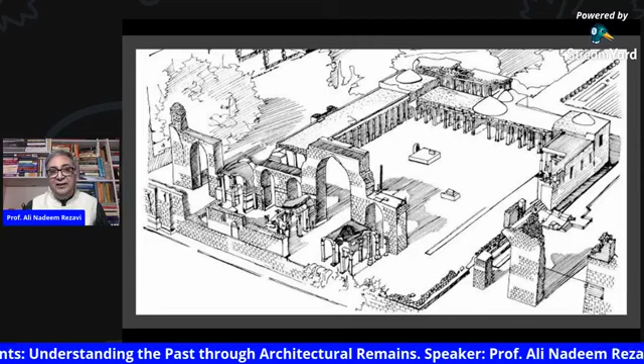For example, here we come to one of the first monuments which was constructed after the establishment of the Delhi Sultanate in India. Now, with the establishment of the Delhi Sultanate, a new type of culture was introduced into the Indian subcontinent. I don't know whether you have read the introduction to volume 2 of Elliot and Dowson by Professor Muhammad Habib. That has also been published independently now by the Center for Advanced Study. It is also part of the Elliot and Dowson volume 2. Muhammad Habib's, and you will find it on the internet as well. Go through it.

Muhammad Habib talks about the fact that after the coming of Islam in India, after the establishment of the Turkish Sultanate in India, two types of revolutions occurred. The first, the urban revolution, and then with the Khaljis, the rural revolution.

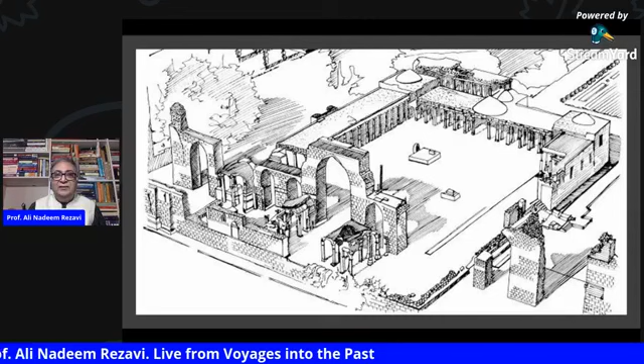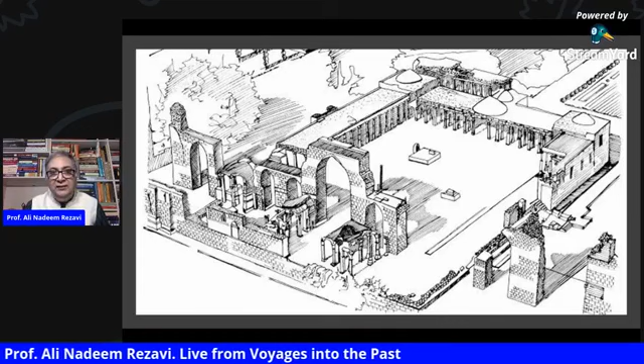What he's talking about is the fact that when these Turkish sultans came and established their sultanates, the artisanal classes, the people who till yet had been living in the villages, to cater to the needs of these new sultans, the new ruling elite, the nobility, started migrating towards these urban centers. Slowly and gradually, not only did the size of these urban centers start growing, but when they started living along with the new masters, they started imbibing the new culture and habits.

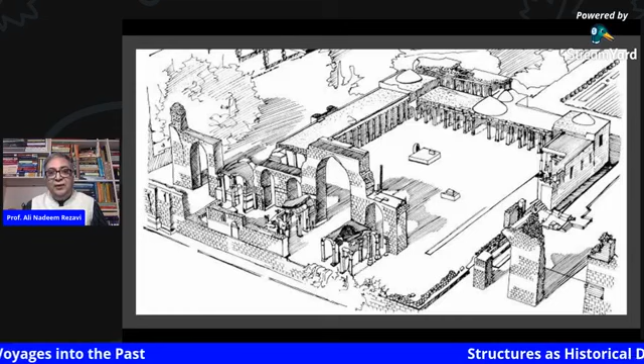And one of the results of the interaction between the local indigenous cultures and the one which had been brought into India by these conquests was that a new type of architecture, new types of buildings, everything started growing. And one of the finest examples of how there was intermingling of both the cultures soon after the establishment of the Delhi Sultanate can be reflected through this monument before you.

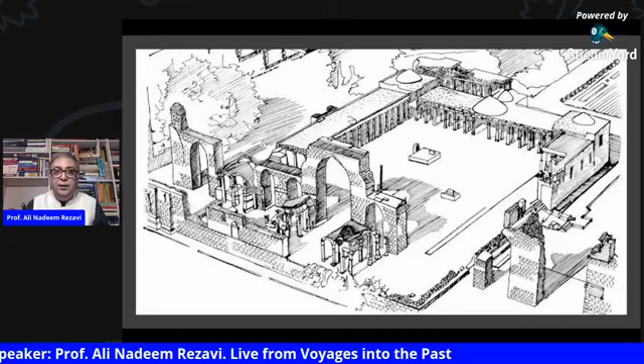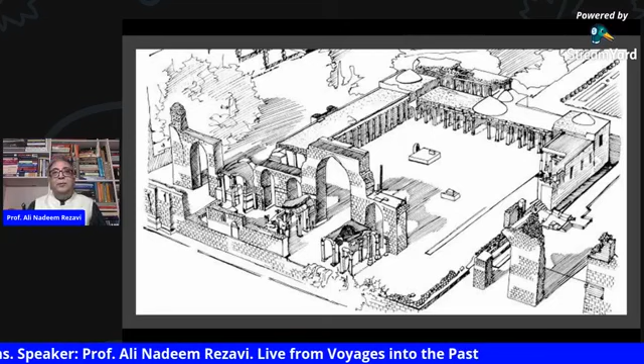The sketch of the monument which is before you is that of Qubbatul Islam, which in a corrupt form is generally called Quvvatul Islam. Quvvat means strength. People thought that because it was a conquest, the mosque which they would have constructed should be known as Quvvat, the strength of Islam. In fact, this whole nomenclature was given by none other than Sir Syed Ahmad Khan, who misinterpreted the name Qubba with Quvvat.

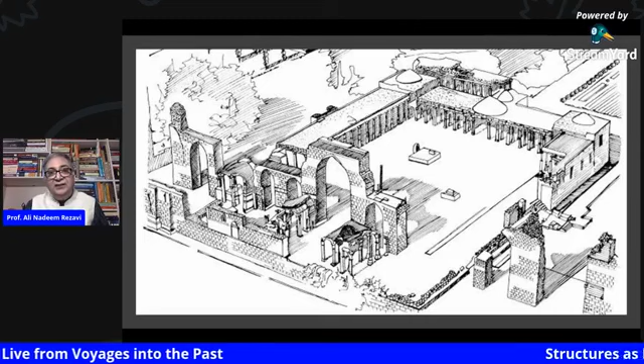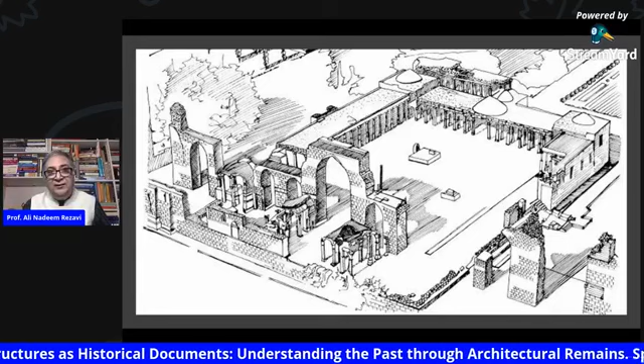In the Sultanate sources, the term which occurs for this particular mosque is Qubbatul Islam, the dome of Islam, the center of Islam. You know very well that one of the reasons for the establishment of the Delhi Sultanate was the fact that Central Asian lands had been cut off by the Mongol invasions and depredations. The regions from where these Ghurids and the Ghaznavids had come had now been closed by the Mongol invasions, and these people could never return back, and they had to settle in the country with their own thoughts and religion and so on and so forth.

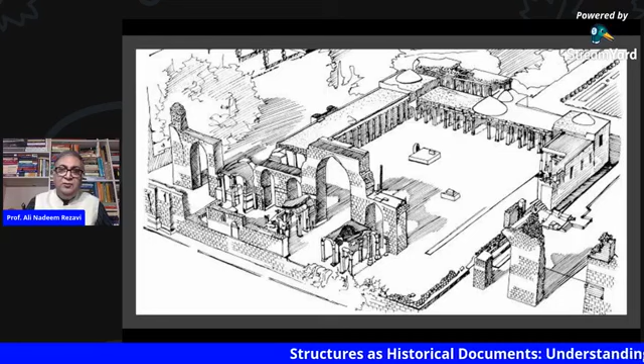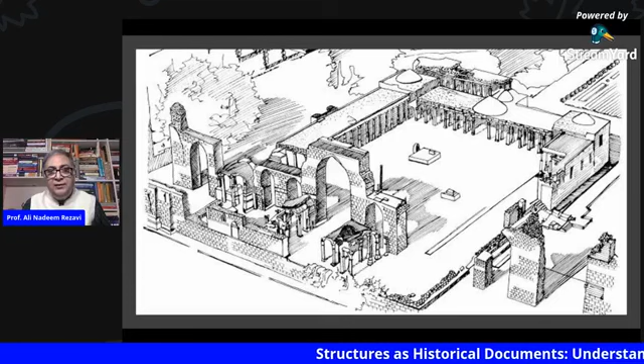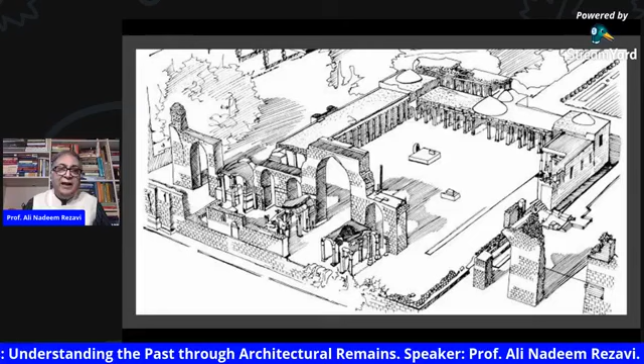And here they wanted to construct a new type of building which had generally not been known in India, the mosque, where the mosque was supposed to be not only a religious center, but one of the signs of imperial authority as far as the Islamic world was concerned. So orders were given to construct a mosque instead of a temple. The architects of this building were the Central Asians, who told the persons who were actually involved in the construction what shape this new building should have.

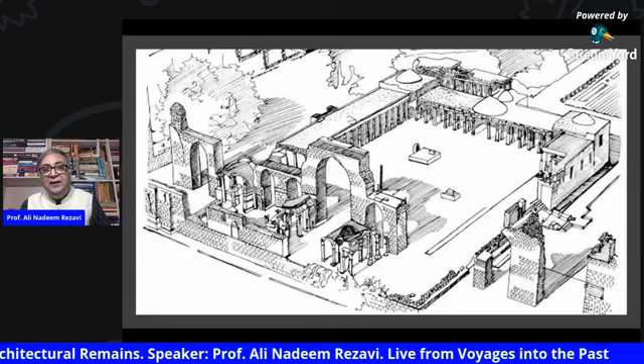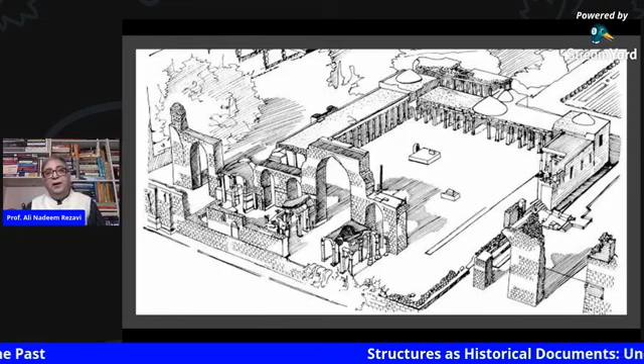The local artisans, who were actually the builders, had never seen a mosque. They knew only the old technique. And that is why what resulted in this mosque was a building of a new shape, a shape which was not known, but based on a technique which was known since the ancient period in India, the trabeate and the corbelling. Naturally, the material which was used for the construction of this building was the local material which was available.

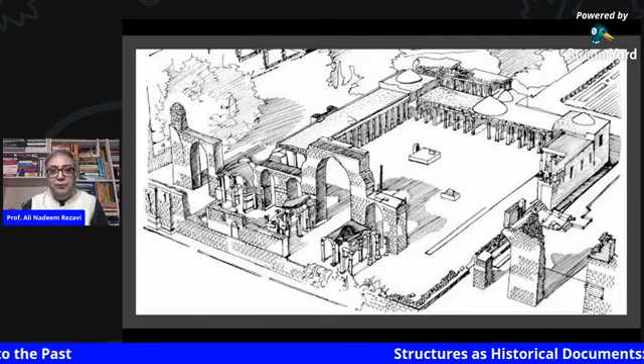In the recent few days, you must have heard that there is also a litigation going on, and someone has gone to the court claiming that it was a Jain and a Hindu temple. In fact, 26 or 27 temples had been broken to give form to this particular building. If you go to this structure, you will find that there are many pillars which actually belong to the temples, with the type of decorations which are generally found in temples. The sources of the period, however, for example Tabaqat-e Nasiri, inform us that the material of 26 old temples had been used.

They do not say whether these 26 temples were broken or the material of the broken temples was reused in this particular type of construction. We know there is a work by Dr. Alka Patel, who is in one of the American universities. Her work in Rajasthan and Gujarat shows that there still exist a number of mosques, as well as temples which had earlier been mosques but were later reconverted. Whether they were reconverted or the material of those buildings was used is a very open question.

But what is established is the fact that old material was used, number one. Number two, the technique which went into its creation was the same technique which had once been used in the making of the temple structures.